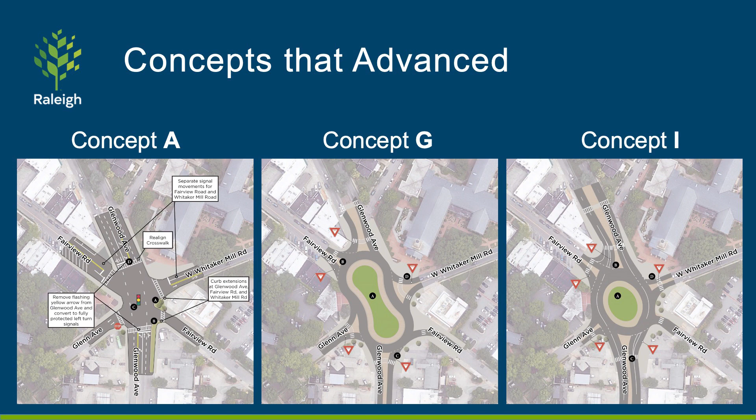3 of the concepts received generally positive feedback and are being advanced for more detailed analysis. These concepts are Concept A, which includes curb extensions and left turn signal timing improvements, Concept G, the single-lane roundabout, and Concept I, the multi-lane roundabout.

There was also strong public support for closing or modifying Glenn Avenue to help simplify the 5 Points intersection. The project team has explored keeping the street open for two-way traffic, but restricting eastbound access to the 5 Points intersection for safety.

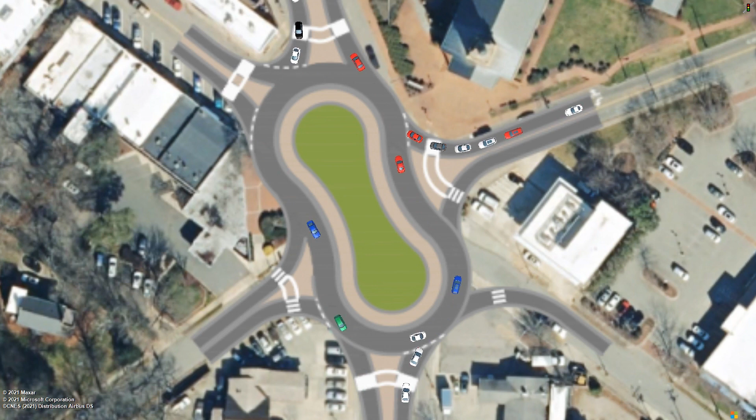As part of the evaluation process, the project team completed a detailed traffic analysis that incorporates potential change in traffic volumes in and around 5 Points. A safety assessment of each concept was also performed to help understand how each concept might reduce the number or severity of crashes. The project team has developed a more refined drawing for each of the remaining concepts. Design details such as property and driveway impacts or precise dimensions will not be determined through this study.

Concept A includes traffic signal timing and minor geometric adjustments to the intersection. This concept would shorten pedestrian crossings of the intersection through curb extensions, and it will remove the northbound right turn lane from Glenwood. This will make the pedestrian crossing easier and will moderately reduce speeds through the intersection.

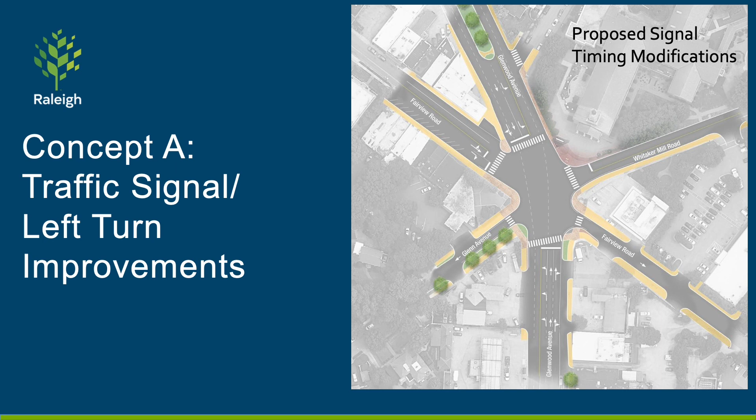Concept A also separates traffic movements and reduces driver confusion through 2 primary changes. Traffic signals will be modified so that traffic on Whitaker Mill Road and Fairview Road will no longer have a green light at the same time.

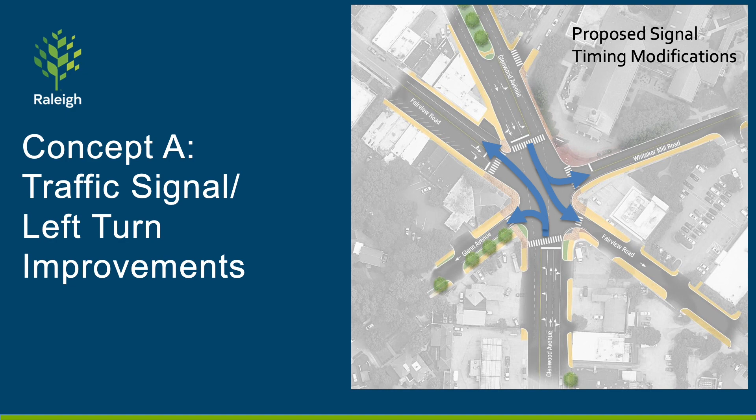On Glenwood, a protected left turn arrow will be provided in both directions so that oncoming traffic is stopped when left turns occur. This change is expected to reduce the possibility of crashes by reducing the number of vehicle conflicts. It will also provide a more comfortable walking environment because left turns will not conflict with the walk signal.

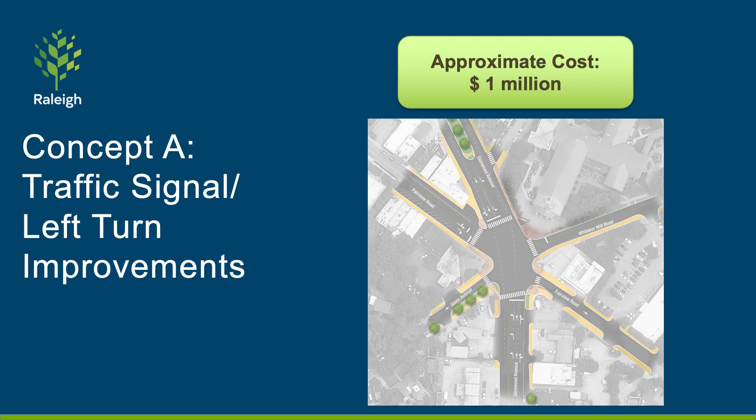Concept A is expected to be the least costly of the 3 and could be partially implemented as an interim improvement before funding becomes available for other concepts. One trade-off for this concept is slight peak hour traffic delay due to the signal timing modifications and the right turn lane removal. However, the intersection is still expected to always operate within capacity.

2 roundabout concepts were also advanced, a single lane roundabout and a multi-lane roundabout. Both concepts would slow down entering vehicles to 25 miles per hour or less on single lane approaches, or to 30 miles per hour or less on multi-lane approaches. This is expected to substantially decrease severe crashes as well as address extreme speeding. Crosswalks will be shortened and users would only cross one direction of traffic at a time. Additionally, the central island of the roundabout provides an opportunity for additional open space and streetscaping.

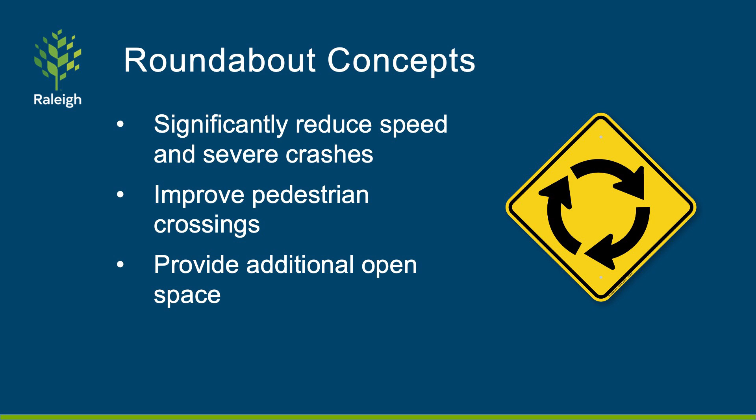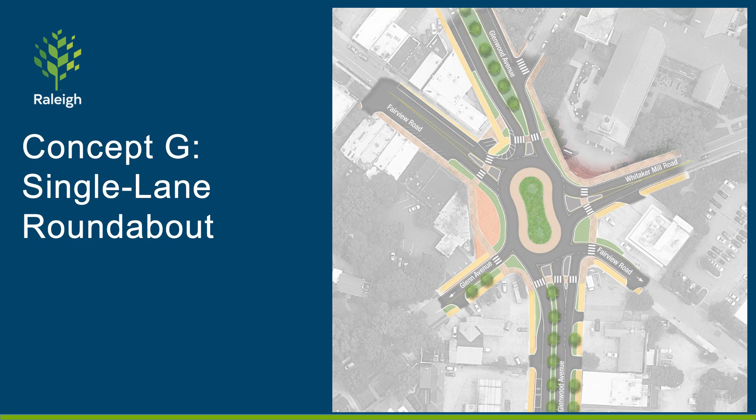Concept G would reduce Glenwood Avenue to one lane in each direction north and south of the intersection. While some parking and business driveways may be modified, the reduced footprint of Glenwood Avenue and the 5 Points intersection will provide the opportunity to repurpose street space for additional parking or open space. The biggest trade-off for the single-lane roundabout is the impact to delay and backups caused by the lane reduction on Glenwood Avenue. During the heaviest travel times, traffic may divert to parallel routes such as Oberlin Road, Capitol Boulevard, and Wade Avenue to avoid 5 Points.

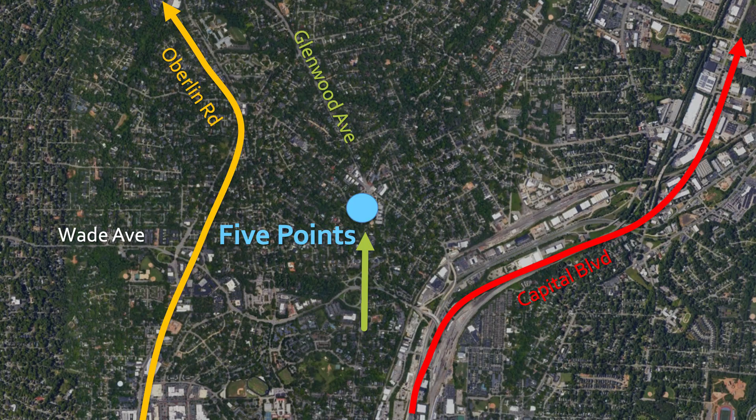While we cannot know exactly how driver behavior will change, nor can the exact amount of traffic diversion be known, it is estimated that 20 to 30% of through traffic will change behavior and either take another route, shift their travel time to an off-peak period, or use another mode of transportation. The improvements in Concept G are estimated to cost between $5 and $10 million, which is much greater than Concept A, but less than Concept I.

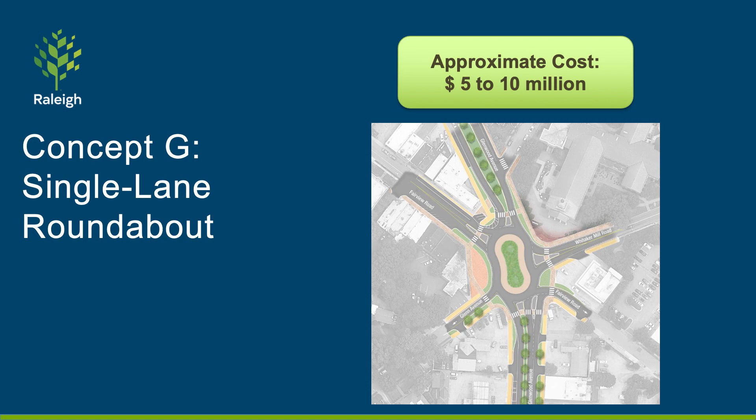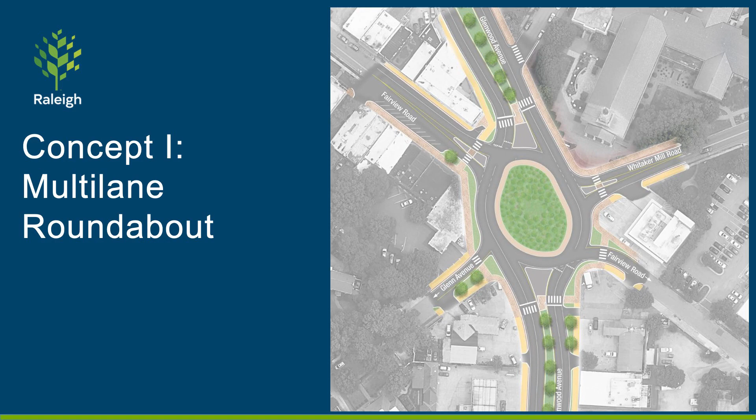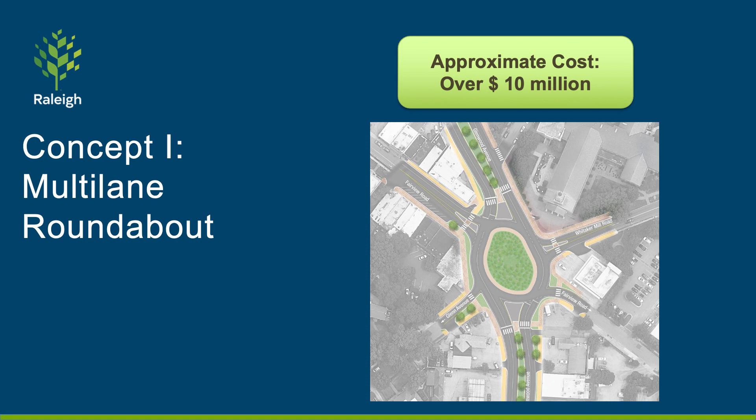The roundabout in Concept I maintains 4 lanes of traffic on Glenwood, including 2 entering and exiting lanes at the roundabout, but with single-lane entries and exits on the side streets. This is expected to process traffic flow at about the same rate as the existing intersection, but with much slower average speeds. Though this concept doesn't directly change parking near the intersection, some parking in driveways may be reconfigured to facilitate the roundabout. Traffic signals will be installed at the 2-lane crosswalks to help pedestrians safely cross multiple lanes of Glenwood Avenue. Concept I is expected to be the costliest and most impactful of the 3 concepts, with costs exceeding $10 million.

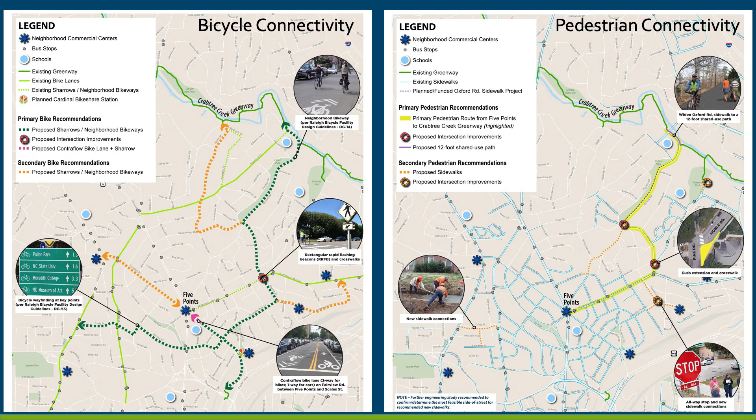One of the goals of the 5 Points Streetscape and Safety Study is to identify improvements that support connectivity between the 5 Points intersection and the Crabtree Creek Greenway Trail. Several alternative routes for bicyclists and pedestrians have been identified that will connect the trail and other activity centers in the neighborhood. We request you review these wayfinding and connectivity recommendations on the project website and provide your comments via the online survey. The project team has prepared a concept comparison fact sheet.

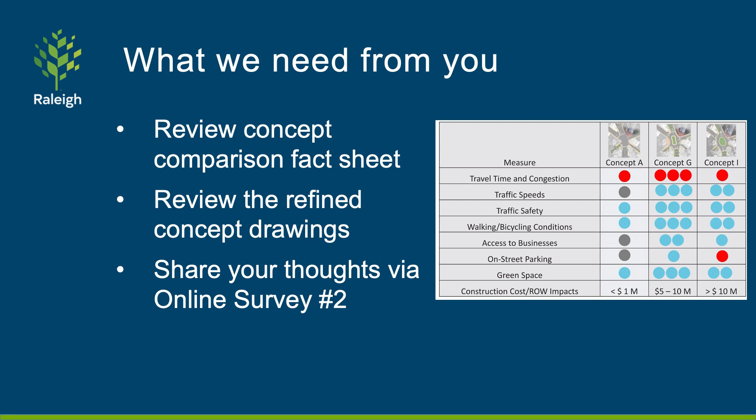You are invited to view the fact sheet and the refined concept drawings, which are posted on the project website. After you review these materials, please take the survey to provide your comments. The survey can be accessed on the project website through June 9th. After this touchpoint, we will use your feedback to further refine the concepts and evaluate potential adjustments. The project team will then work with NCDOT to identify a recommended set of improvements for 5 Points, which can incorporate treatments from one or more concepts. We will also perform a detailed assessment of costs, impacts, and feasibility for the project recommendation. Later this year, we will have a final public touchpoint to review and comment on the study recommendations.